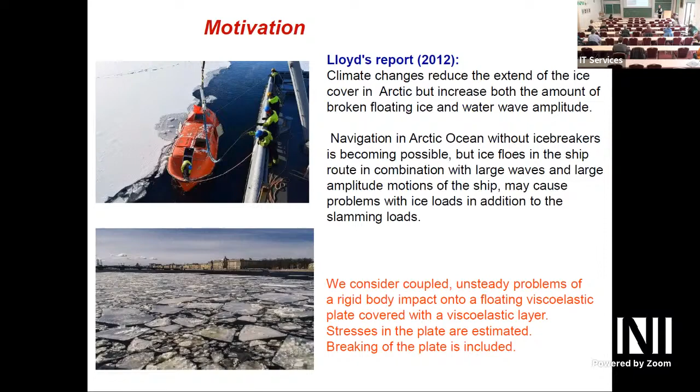And also navigation in ice—Kevin Maki already mentioned this. That is the channel behind the icebreaker, and you can see there's almost no open water. The icebreaker breaks the ice, but there are pieces left, and a ship or convoy of ships moves through that broken ice. So there are always impacts between the ship hull and the ice.

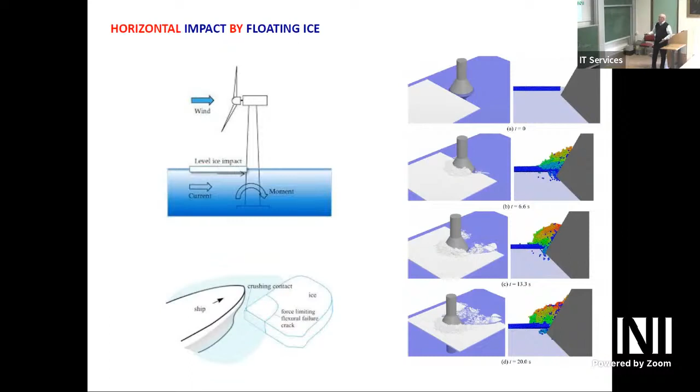There are different types of impact. One is horizontal impact, which is very much studied, in particular because of periodic forces on offshore structures and vibration of that structure caused by those forces. A lot of research has been done in that field, but we are studying another type of impact, called vertical impact. Also, our impacting body is rigid and blunt, meaning damage is caused by bending.

It's not like that—so we do not consider localized loads. Localized load is another problem, not covered here. If you ask something about crushing, it's not about this presentation; that's a presentation by somebody else.

And possibly you remember this figure, but not like this—shown five years ago by Hayley Shen. No? Instead of animals, there were people on the ship. No, you don't remember, but I couldn't find it, so I used that one.

So the problem is divided. The problem of impact in the presence of ice, or on the ice, is divided into pieces. One of them is impact near the floating ice—relevant in particular to the presentation by Kevin Maki, when we navigate close to the ice edge, or slamming of the ship close to the floating plate. This is most relevant to the lifeboat problem, but we study this problem.

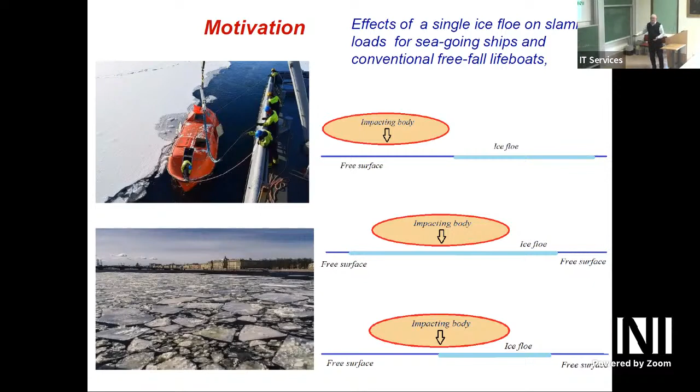So it's impact exactly on the floating plate. Let's say plate—sometimes I'll say ice, but don't worry about it. I'm not using anything from ice except the Young's modulus and the density of ice in calculations. There's another more complicated case when the impact occurs such that both open water and ice are involved, but this case will not be shown. We'll concentrate on the middle picture only.

This workshop is about mathematics, and what we did here is mathematics, but I hope the mathematics I show will not be very boring. I will concentrate on results from mathematical analysis which are not always intuitively clear. In particular, I will explain the regularization of the impact problem, which I believe is not well understood—the viscous effect in the impact problem.

We are well familiar with damping because of viscoelasticity, or elastic or viscous effects, or other effects in the wave-ice problem, in the hydroelastic problem, but not so much in the impact problem. You will find that in an impact problem of short duration, the effect of damping is just opposite to what you're familiar with in wave problems.

Then about how to scale stresses and how to treat the impact on an already damaged plate, including the breaking of the plate into pieces—this will also be covered.

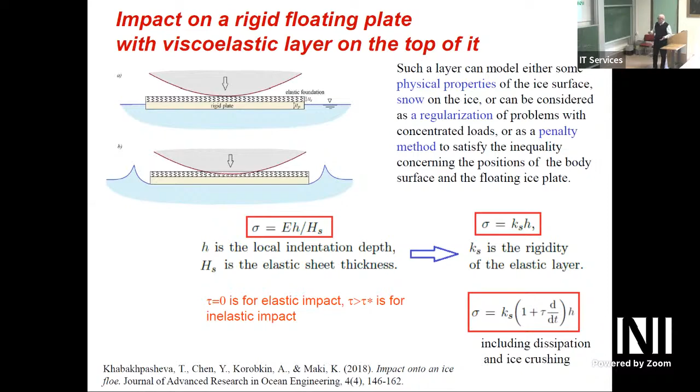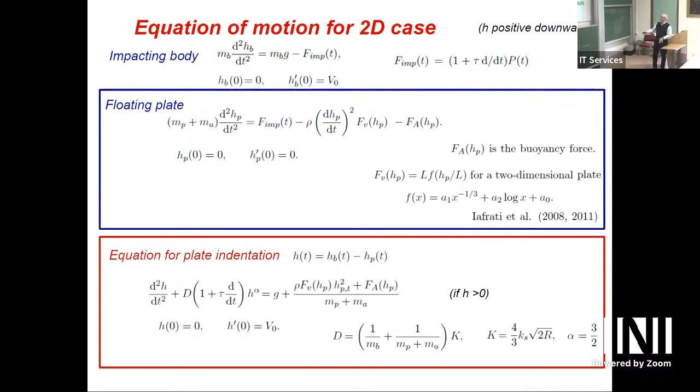It's impact on the floating rigid plate. That is the equation of the plate motion. This is the equation of the impacting body motion, and that is the equation for the plate indentation using the model I showed.

That is the results, theoretical results, by integrating these second order differential equations, just three differential equations, and by CFD. This calculation was done by Kevin Maki and his PhD student. You can see for velocity of the body and velocity of the plate, the theory and CFD give very close results.

This in particular means, as in many impact problems, viscosity, gravity, surface tension don't matter. It's mainly inertia. However, in the impact problem, the coupling between elastic deformation and loads is very important.

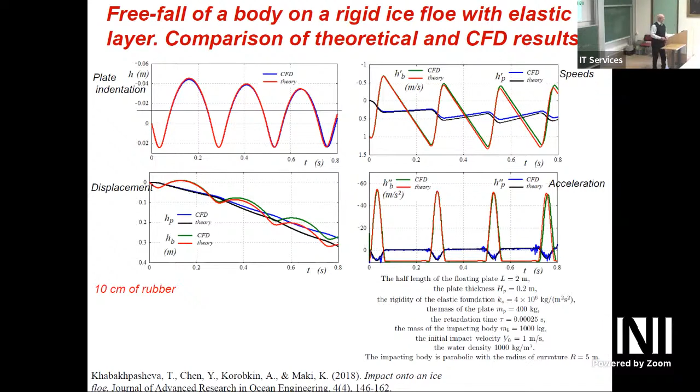This is a problem Kevin could confirm, a problem for CFD. It's still complicated to solve hydroelastic problems by CFD in a reliable way. He's confirming that if the ice is small, then the problem becomes more complicated.

You see there is ice, then it appears on the bottom of the body, and there could be another piece, and then they come together. That is complicated, but it's possible to describe it.

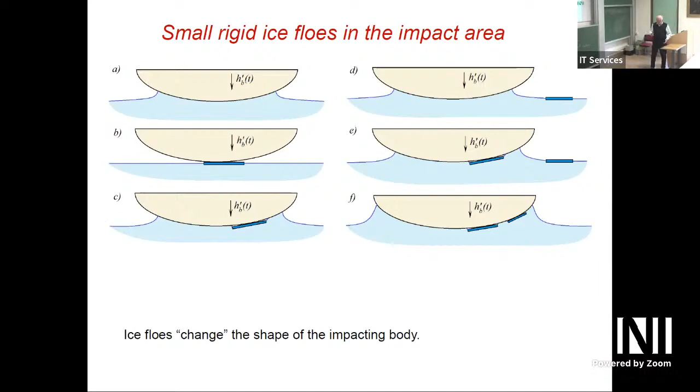To model this situation, we modify the shape of the floating body or shape of the entering body by including this plate. The shape changes in time, but we can do this—it's not a big problem. If the plate is elastic, which is the more complicated case, we use the same things.

So we introduce also that soft layer, but in this problem, our goal is to calculate impact loads, not to assign them, but to calculate, to compute them.

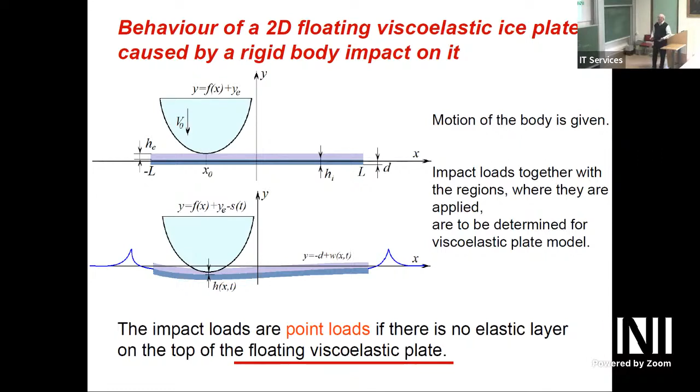To evaluate them, we need that soft layer. Without soft layer, there is only concentrated load. This is the illustration. This is not exactly the problem we study, it's not about impact, that is the static problem.

If we consider a floating elastic plate of infinite extent, and put a cylinder on top of it, I believe you'd agree the contact occurs at a single point. If the mass is 0, so no mass, then we increase the mass, do you expect contact between the cylinder and the plate of finite dimension? No, it's just the same point, exactly the same point.

Because the curvature of the plate is smaller than the curvature of the disk, it's always only concentrated loads.

And if you increase this, don't worry about large deformation of the plate and the linear theory I use, because the vertical axis scale is much smaller than the horizontal scale.

When we increase much more the mass of that cylinder, do you expect an interval of contact? No, the one point kind of bifurcates, in some sense, if to use the complicated mathematical word, into 2 points. See, one point over here and another one over there. If you continue increasing, each point is bifurcated into 2.

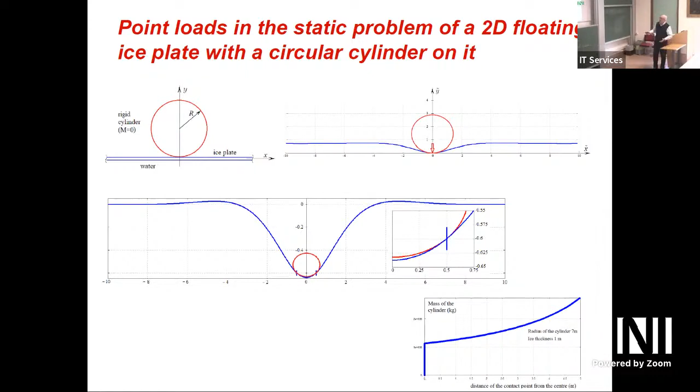That is the hydrostatic pressure, and that is impact pressure. This impact pressure we calculate, we do not assign it. So we calculate it by using, in some sense, a generalized Hooke's law.

The function g of delta, where delta is the relative compression of the elastic layer, describes the property of the material. We include that this soft layer could be compressed very much, not just small compression, and it's described by that function. In our calculation, just one was selected. It has no relation to any specific material, but you can use any other relation over here.

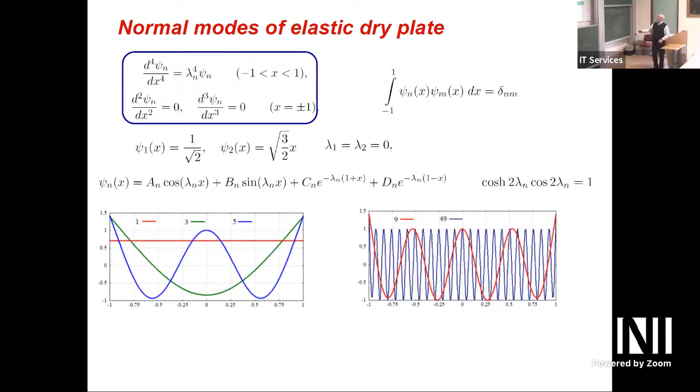So the normal modes for the plate with the free edge, no bending stresses, no shear force, are shown here, and some of them are presented. They are normalized.

As for the added mass matrix, for a floating plate of constant thickness, it's calculated analytically. Results are not shown, that is a special part of our research. Analytically means it's expressed through Bessel functions—the actual Bessel function, J, not modified, nothing else.

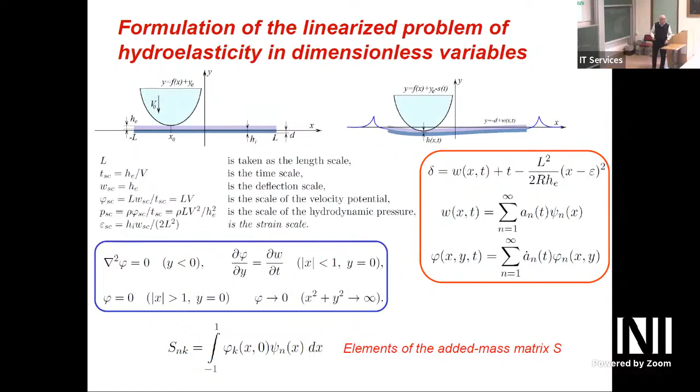This means that these elements we can calculate for large N and K, which is important, and will be used to solve the problem for a cracked beam, cracked plate.

So finally, once we put everything together, we arrive at an infinite system of equations where the first term is for structural mass, that is added mass, this is about bending, and that is about viscosity, and this is the impact from impact loads. That is the hydrostatic force.

The difficulty with this equation is that the forcing term should be calculated at each time step by integrating the deflection and all other things projected on the normal mode. That is complicated, but for modern computers, or even not so modern ones, it's not a problem these days.

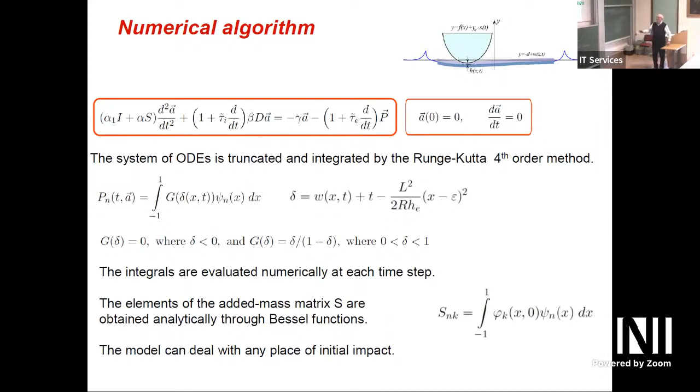As I said, the elements of the added mass matrix are calculated analytically using Bessel functions. They are not shown here, but I hope it will be published—so it's not published yet. Now I'll show the results and discuss the viscous effect in the impact problem.

That is the impact on a plate of length 5 meters, thickness 15 centimeters. A soft layer of 1 centimeter is on top of it. Impact is by, say, a cylinder of 5 meter radius, so that is a very blunt body, and impact speed is 1 meter per second.

The impact loads are separated into elastic loads and viscous loads. Viscous load is just the derivative in time of the elastic loads, and they are shown here—that is the elastic load for different conditions. So 2 means there is no viscosity in ice, but there is viscosity in the soft layer. 4 and 5 have viscosity in both layers, in both elements, but they are quite small.

You can see that the contact between the impacting body and the plate is always finite—about 0.2 seconds, very short. Nothing happens during this period except the plate can be broken several times, but the displacement of liquid is negligible. Other effects like gravity, surface tension, and viscosity can also be neglected because nothing happens in terms of displacement during that time. So it's not about displacement, it's about acceleration—acceleration and inertia are the main effects.

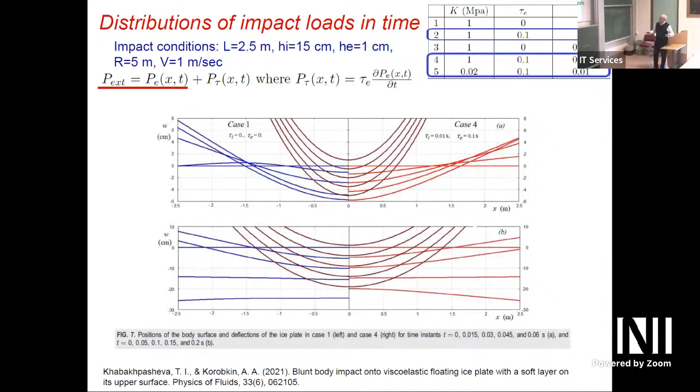This is what I told you, how it happens that the body penetrates into the water and the plate finally separates from the water. That is for small time, and that is for larger time. So that is due to elasticity. It's not bouncing, it's some bouncing, but due to elasticity. And that is the strains. Strains are too high, it will be shown.

Once we analyze strains, we try to find out what the strains are dependent on, and we arrive at this formula for so-called scaled strain. That strain, or maximum strain, is proportional to the length of the plate, impact velocity, and inverse proportional to the thickness of the plate. So if you're thinking about the maximum velocity which breaks the plate, we can use this formula.

This comes from the analysis of numerical data, and we find the maximum velocity under which the plate is still not broken by the impact. Big VP here is the so-called bar speed. It's the speed of compression wave propagation in the material of the plate.

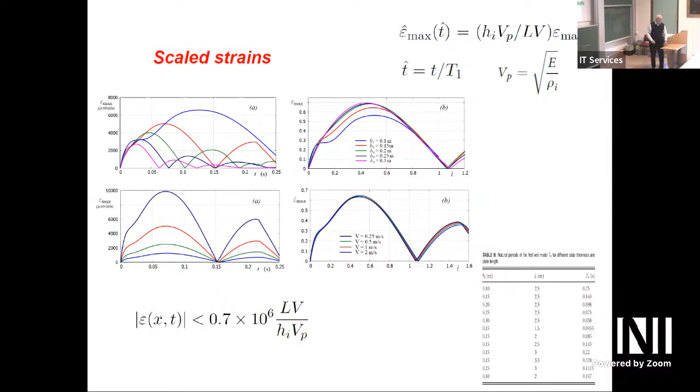So that scaling is shown over here. That is maximum strains as a function of time, calculated for different velocities, different thicknesses of the ice of the plate, and then the scaled strains are shown over here. So clearly, the strains are proportional to velocity and inverse proportional to the thickness. Also asymmetric impacts can be studied, just for illustration, everything done but not published yet.

So now the impact on the plate with a crack, that's the story. If you remember, it's very important that the added mass matrix can be calculated for any number of modes, 1,000, a million, any number, doesn't matter, because it's given by an analytical formula.

Because of that, we can use this matrix to solve the problem for complicated structures. For example, not necessarily, but for example, a plate with a crack over there. To model this situation, we use the fact that the plate is thin, and we use matched asymptotic analysis. So we can replace the crack approximately by a torsional spring. And there, it's not something special, there are handbooks how to do this.

So for different configurations, there's a relation between the rigidity of the torsional spring and the thickness of the plate and the length of the crack. You can find it in that paper, for example. The rigidity is related to the relative length of the crack by this formula.

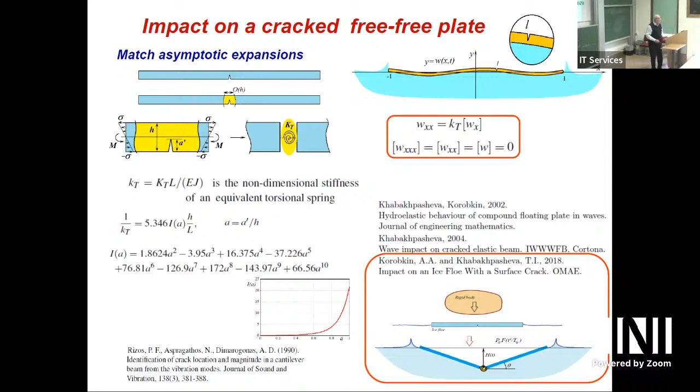So this problem was solved several times, including this case, or a very simplified case, when this part of the plate was approximated as rigid, so two rigid plates connected by a spring, and impact on it. Then the length of the crack was calculated. The length of crack was shown to be described by a harmonic oscillator equation. Rigidity in that equation is dependent on the solution, so a nonlinear equation was derived and solved.

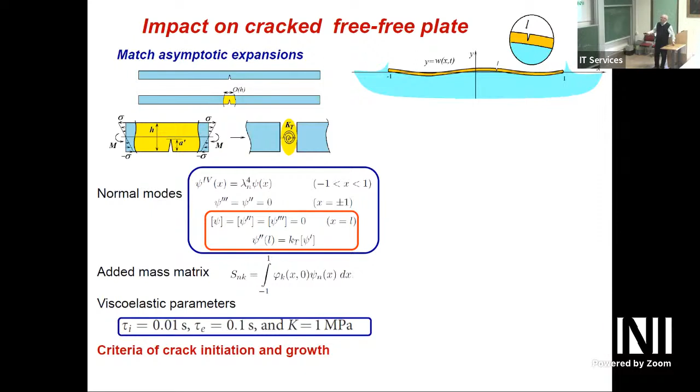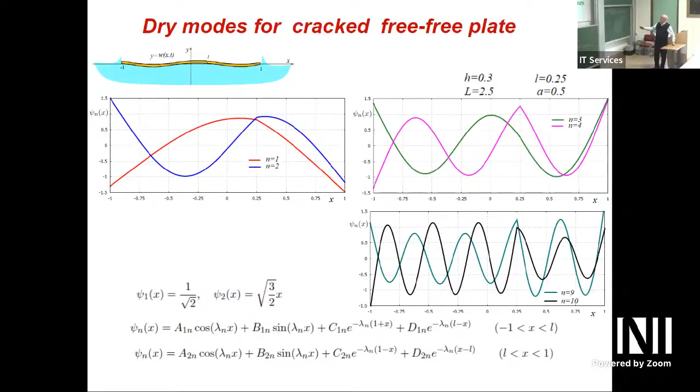So that is how we can find normal modes. They are over here, and some of them are shown in this way. That is the lowest mode. There you see they always have the angle, the corner, at the corner n equal to 2, and higher numbers are shown over there. So we calculated that, and then that is the critical point.

So we use the normal modes for the homogeneous plate without a crack, and we use these functions to represent the modes with the crack, where C is the so-called transformation matrix, which relates different modes. This matrix actually is not complicated, its elements are given by this formula.

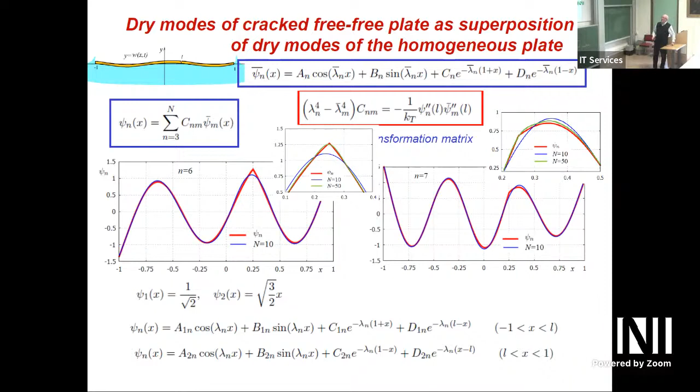So here you can see some results of the approximation, and you can see that 50 smooth modes is enough to approximate in a good way the modes with the crack. And then, because we know the added-mass matrix for the smooth modes, we can use it in combination with the transformation matrix to find the added-mass matrix for the cracked plate. So it could be one crack, it could be many cracks, it could be internal supports, different conditions, the plate could be wetted just partly — anything is covered by this formula.

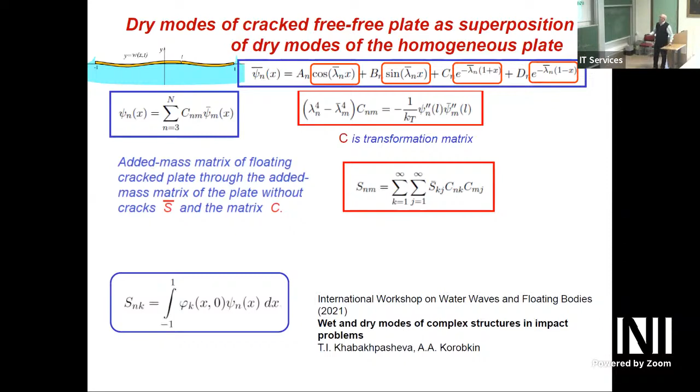So in this way, we find the critical part of the solution, which is the added-mass matrix. And then we use that failure criteria - it was mentioned that on the tip of the crack, the stresses have these asymptotics, where K is the stress intensity factor, and that stress intensity factor is calculated within that model of thin plate, and it depends on the bending stresses at the same point.

You can find it in the paper by Marchenko. The crack is assumed to grow if that intensity factor is greater than the so-called ice fracture toughness, and the results should be here.

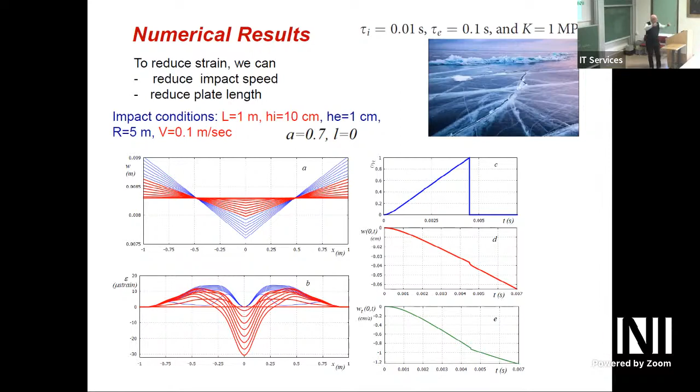Everything solved one after another. And that is more interesting - what's happening after the plate is broken? It's broken into two parts now, but the two parts are still there, and the body is still in contact with them and still penetrating.

Then what we are doing - we solve the problem until the plate cracks into two pieces, so it's the red curve for strains. After that, we continue calculations, but we continue with two plates. And with two plates, the stresses at the place of breaking are 0, but they are there, and the strains at the central point are increasing in time over here.

And then once we come to that failure condition, it goes to 0, right, and we continue calculation. But what we were concerned about in this calculation - you see there is a kind of jump in deflection and an even more visible jump in the velocity. Not very big, but still visible. So we couldn't understand - everything looks continuous, but there are jumps.

Why? Once we go from the unbroken plate to the broken plate, we assume that deflection before and after are the same, and velocity, they are the same. This is the condition to continue. But it looks like not, and that is a big problem. And we try to analyze it.

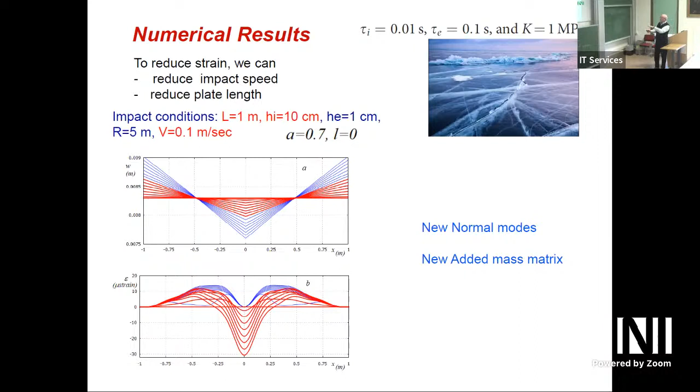So we solve this problem as a new normal mode with new added masses, accounting for the plate being broken into two, and then how to break down what's happening after the plate is broken into two. To do that - we were in a hurry to publish these results, and we published in what could seem a strange journal, because it's like a toy problem, not so much related to the breaking of floating ice.

But in this problem, we considered the plate as a two-dimensional problem, clamped at 2 points, with an air chamber, and we increase the pressure in that chamber slowly. So the deflection of the plate is static, and we find the shape of this plate just before the plate breaks into two parts. It's broken in this calculation at that time, and it's happening at the center.

So it's broken, and the question is how to continue this calculation. There is no water, right? So it's just a structural problem - how to continue calculating. And we found that, strangely, after it breaks once, the story doesn't end.

Even if we do not increase the loads, and loads are uniform, the plate breaks a second time, and potentially a third time. That is the problem. It's because after breaking, the plate starts to vibrate, and in some places the stresses could be higher than yield stresses again.

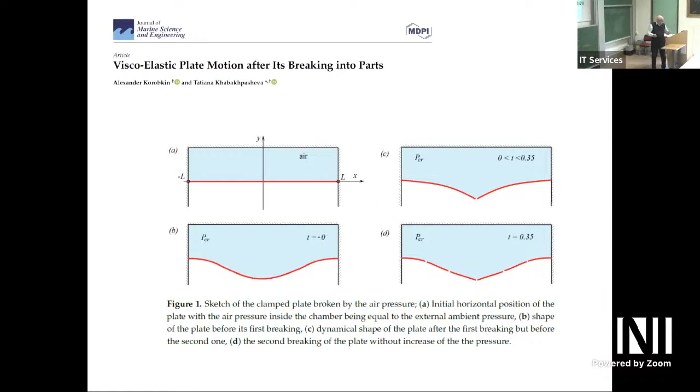We formulated the problem after the breaking. It's shown here. That is the shape before breaking, and that is the condition at the place of breaking, and that is the condition at the wall.

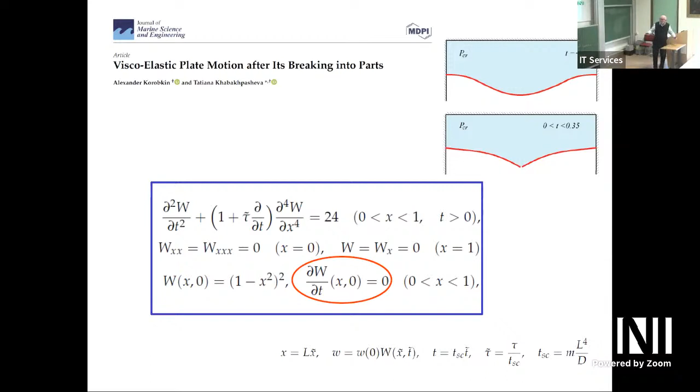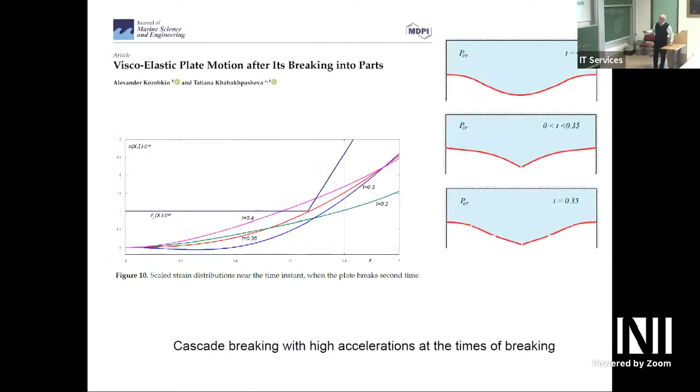We continued the calculation and showed that it's possible that the plate is broken in another place. Finally, it's a three-dimensional impact problem - an impact on the floating three-dimensional plate.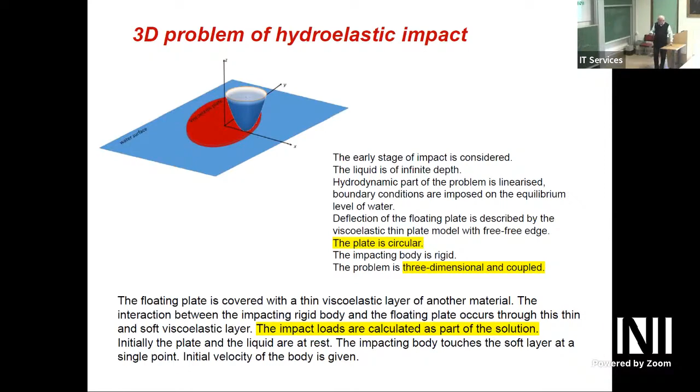The calculation is done for a circular plate, and I believe you understand why. But the theory is three-dimensional and a coupled problem of hydroelasticity. So that is the equation of the plate with a viscoelastic term, and that is the condition on the edge of the plate, a free boundary condition.

That is the impact model, the same as for the two-dimensional case, but now the shape of the body is three-dimensional. This is the shape function of the body. That is the problem for hydrodynamic loads.

In addition, because it's already complicated, what's the point? We can also add an equation for the impacting body motion, saying we drop something on the plate and then it could bounce back and do something.

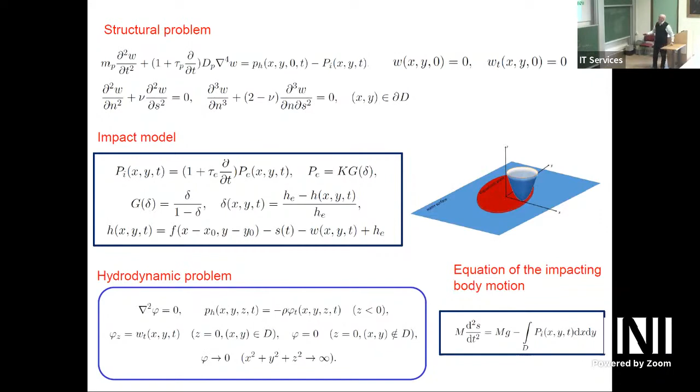If we introduce the coefficient - I believe Luke showed something like that - if we introduce normal modes of that plate, which are orthogonal, then we can use decomposition of the deflection with respect to this mode, and everything is the same.

Finally, even the equations are the same. Equations are with the added mass structural term - that is the rigidity term, and that is elasticity, and that is the impact model and impact term, which depends on our impact model, seemingly the same as in the two-dimensional case.

But the problem is that these forcing elements we should calculate at each time instance, so it's extremely complicated. Another problem is that these functions, in terms of their frequency, are too close to each other, so we need to take many of them.

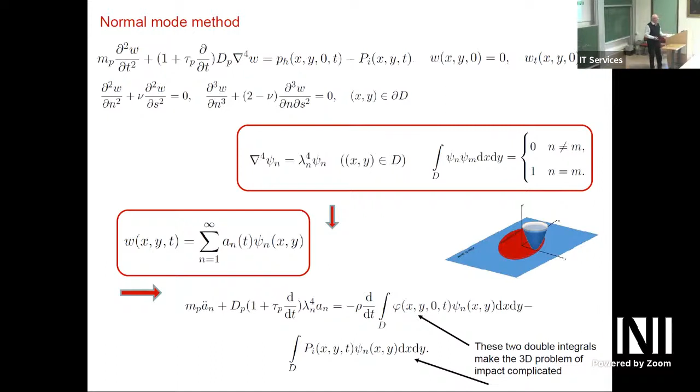For the circular plate, we ordered the eigenmodes in such a way that their frequencies are increasing. This means that the number of terms in theta, in polar angle, and the number of terms in radius are different, because if we limit ourselves to 100 modes altogether, this means we account for only 20 modes in theta and less than 6 modes in R.

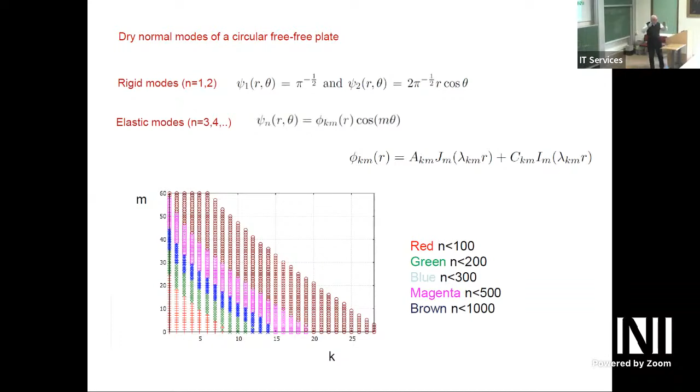So I'm not sure it's a good idea to approximate in radial direction and azimuthal direction separately. Some people do this, but I don't think it's very consistent. So we put all modes together and treat them in the same way.

That is the rigid mode, so no big problem. But what's interesting here is that we can manage, because we did something else in the past - we can find the added mass as the single integral of the product of Bessel functions.

If you're a little bit familiar with Bessel functions, you can recognize that this integral can also be found in tables. It's shown here as an intermediate step, but the product of Bessel functions multiplied by a power function - all those products are table integrals.

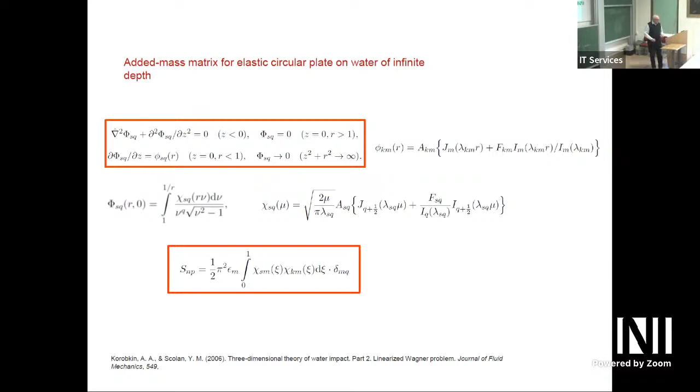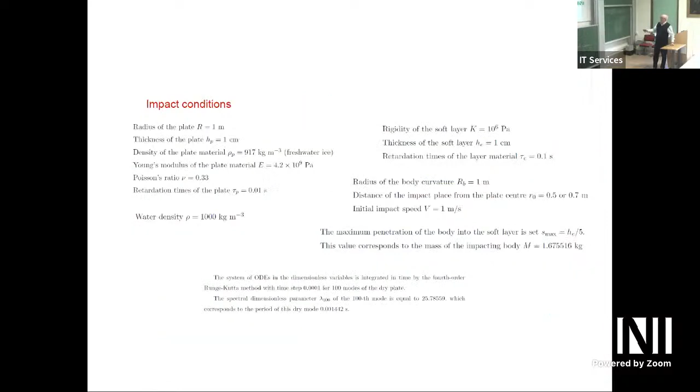This means, again, as in two-dimensional problems, the three-dimensional problem - but for an elastic plate - the added mass is given analytically, and because of that, some conditions and the calculations were done. Calculations were done for this condition. Sorry for that.

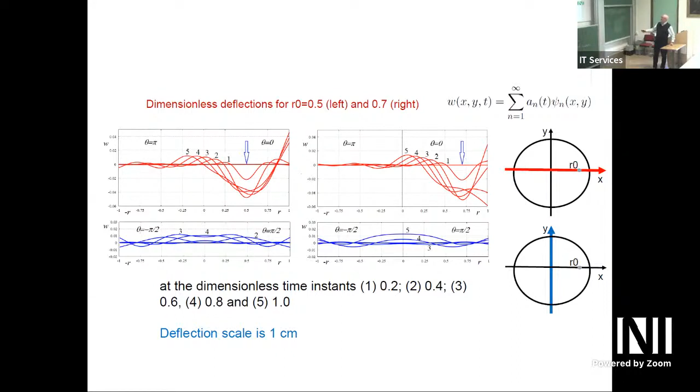The deflections in this direction and in that direction for different impact points are shown here, so we can do this. And also we can calculate pressures. Pressure is something which is not standard to calculate in a hydroelastic problem, because in the coupled problem there is no explicit pressure. Pressure is included in the added mass element.

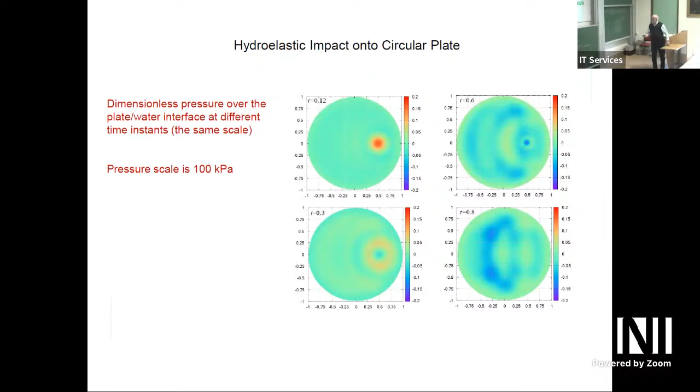So and after that, to return to pressure is very complicated. We need to improve convergence, we need to go to the asymptotics, but we manage this, and we need pressure to understand if there is cavitation under the plate or not. If there is cavitation, the loads would be different. We also calculated maximum strains, and in this calculation we need 300 modes at different time instants. So thank you for your listening.

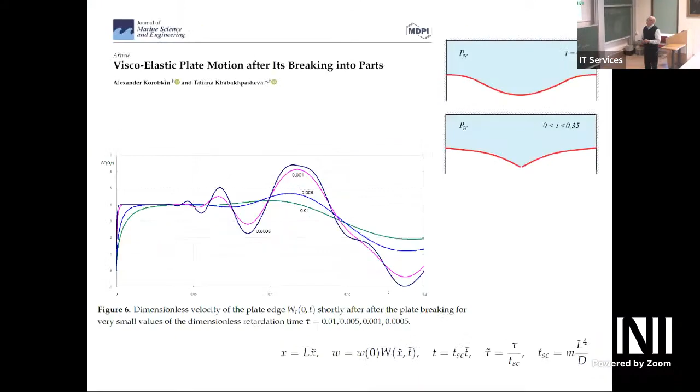Thank you for your talk. I noticed that you were using a yield strain for cracking. Yes. Have you looked at, or perhaps other people have looked at, using a yield stress for cracking instead? If you have a purely elastic body, then there's a one-to-one correspondence. But if it's elastic, viscous, or more complicated, then a yield stress would be more physical.

We use it just in a simplified way. So yield strain is for the elastic model, but it's also quite different across different papers. We didn't use that one, but in some calculations, the review by Erland Schwarz, I believe from 1990, discusses yield strains. As to viscoelasticity, we do not relate the parameter to the yield strain.

So everyone uses a yield strain in other words? But we use this strain. As to viscoelasticity, the retardation time parameter, we also just kind of assign it. We did not use the actual values of the retardation time.

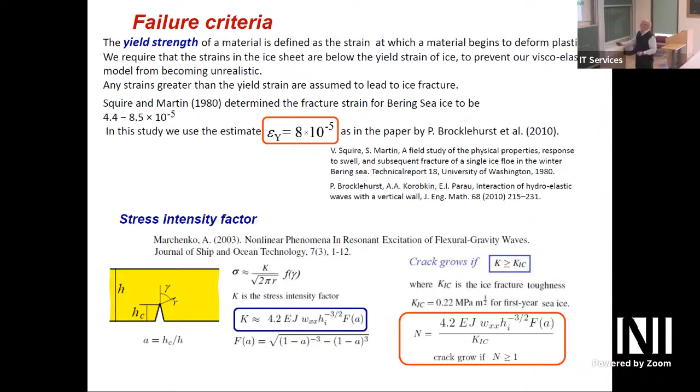So let me show. Just a moment. That is the retardation time. So that is the term describing viscoelasticity, right?

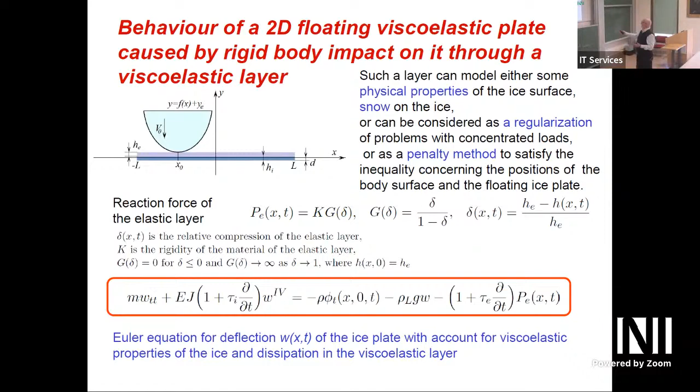And for this tau, we assumed it is small, 0.01 seconds, very small. Because in experiments this parameter is used to fit experimental data, and in some experiments we came across a value of 10 seconds, so very large. So we did not use that, we were kind of close to the elastic case.

Viscoelasticity was used in some sense as a kind of regularization of the problem, so the physics should still be brought to these results. Any more questions? No?